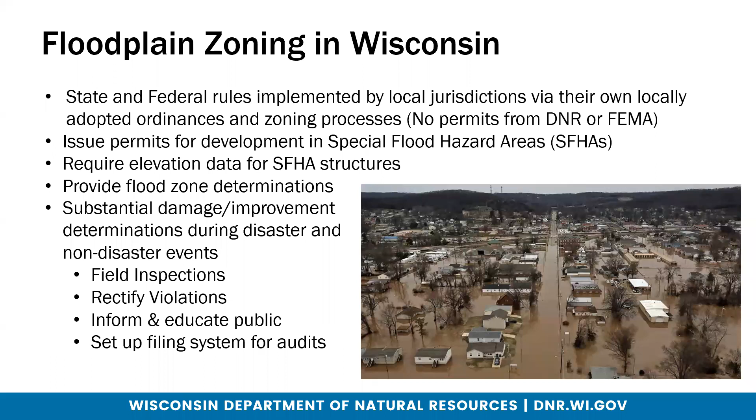And there's a lot of items that you have to do to enforce your floodplain management ordinance. You're doing field inspections, you're doing violations, you're trying to set up a filing system, substantial damage inspections. So there's a lot of stuff that it involves with the permit process.

So as we mentioned in the other sessions, all development in the floodplain requires a permit. So you want to look at your office: do you have a system set up that catches all development? It's tough. For instance, as counties, they may have some townships that have zoning authority. Some are unzoned, some are under county zoning. They may have their own zoning. You might have a city and village that has a building department and they issue the building permit, the UDC permit. They might not, and you subcontract that out.

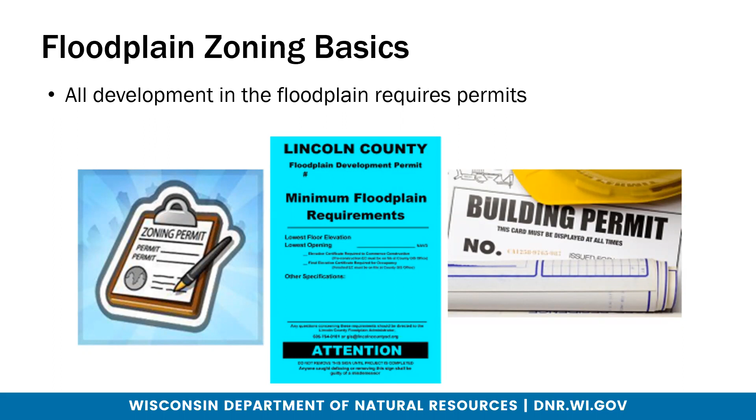How does that contract work? Does the UDC contract only cover new construction? Does it cover additions? How do you track that filling and grading job? That's the golf course changing the stream or adding a crossing for their golf carts. How are you getting that permit for filling and grading? So there's a lot of challenges out there to catch all development. So it's important that you look at your permit process and ask, do you have a process that catches all development for every different scenario? And that's a tough ask.

So when you do get that application in, you have to locate that property, and is it in the floodplain? As we talked about before, you might have this hatched area where my cursor is, and that's where the floodway is. Then you have that light blue area, and that's the flood fringe. And then that yellow area is the 500 year. And then we have those letters with the cross sections.

And what happens if you have an applicant that comes in and he has a pond back here on cross section DD, and he wants to build that house overlooking his pond? You have to have those discussions with them and see, is that area going to meet your ordinance? Is it going to have dry land access back there? Is he going to be able to put fill in the floodway without causing a rise? Those are some of the things that you're going to have to talk about and locate.

And remember, your jurisdiction is only in the mapped area. So if they're building outside of the mapped area, then you're not reviewing your floodplain ordinance. You might have to also review your zoning ordinance, your shoreline ordinance. So there's so many ordinances that you guys enforce, and you have to look at all of them on a case by case situation.

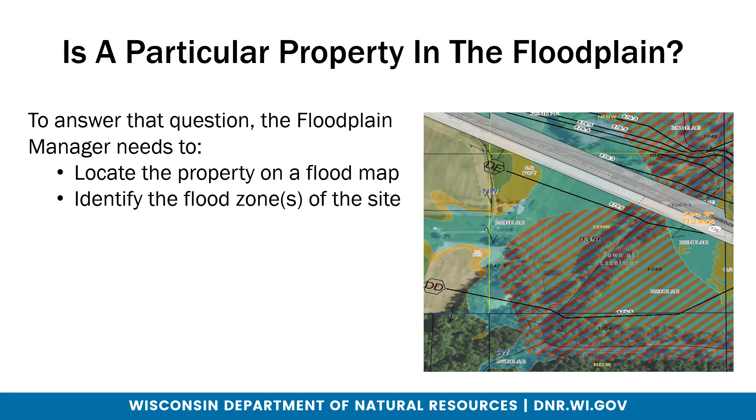So some of the things that you're looking at when a land use permit comes in: you have to make sure that they have the lot dimensions on there, that they have the base flood elevations in there, and you have to figure out what district they're in. Are they in the floodway district or in the flood fringe? Then you can apply those requirements. And if it's in the floodway, you'd have the H&H requirements. So these are just some of the examples of what you're going to need when that application comes in.

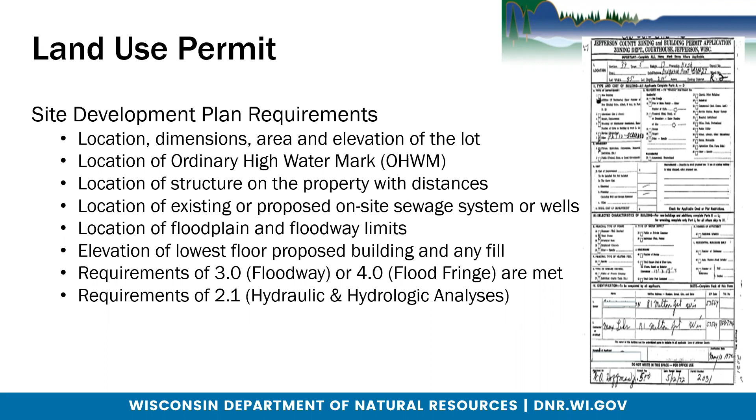The permit process. What kind of inter-office review process do you have? Do you have only one person that reviews floodplain? Do you have someone that reviews that person's work? If you remember only one thing today, I would ask that, if you don't do a checklist, you really consider doing a checklist in your office. When I worked for Sauk County, maybe 10 years we did not have a checklist, and the last 10 years we did have a checklist. And I can't believe the difference it made having a checklist.

When you guys are reviewing a permit application, you get interrupted all the time. You have phone calls coming in, you have the counter traffic, you have all these situations coming at you. And it's hard to remember where you left off on that application. And another thing I found out too, by having that checklist, you write notes. Like this checklist here as an example. I think if you were to create a checklist, I would add a huge comment section.

And that comment section can talk about all the things that were missing, the day you notified the applicant, how you notified them, because all of a sudden, if that permit's in your basket and you're out in the field, someone else can take a look at that application when that contractor calls or the owner calls and they say, what's holding up my permit application? And you don't have to be there because you might be out in the field, you might miss the phone call. It's just an efficient way to

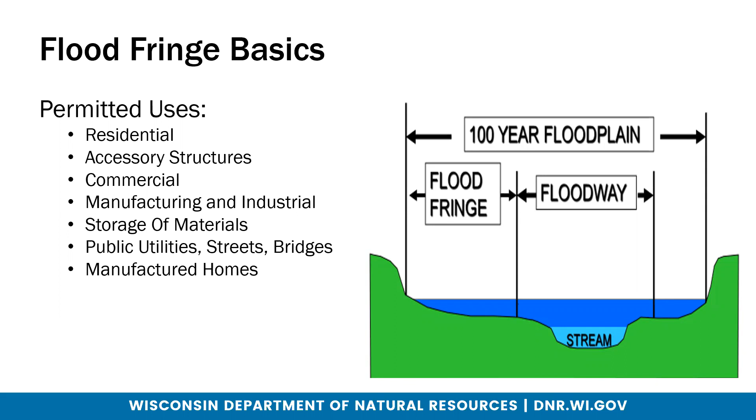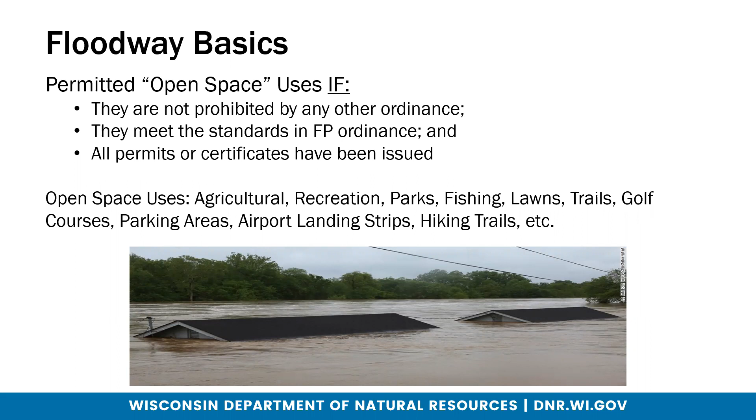And for floodway, it's mostly considered an open space use. You're prohibited from most other uses. If you think of it, it's where the water is moving, so there shouldn't be too many structures put in the floodway. It's important that all permits or certificates have been issued and that it meets your floodplain ordinance. Some of the open space uses, if you think of it, are parks, golf courses, stuff like that.

The floodway, this is a continuation. It should have low damage potential. It should not increase the flood elevations. For the most part, there should be no structures or fill obstructions. The only structure that really should be in the floodway, you'd think of something like a park shelter, with 4 posts and a roof, something that's not going to back up flow and won't be lived in. Those are about the only structures that should be put in the floodway, if you can think of an example. And some communities don't even allow that. So it's totally up to you on where you want to draw that line.

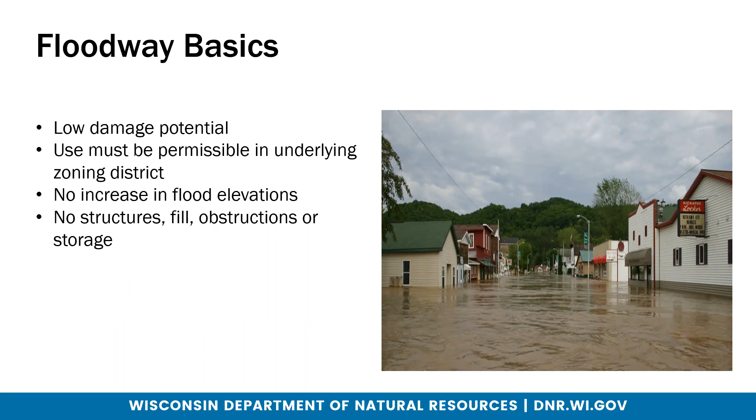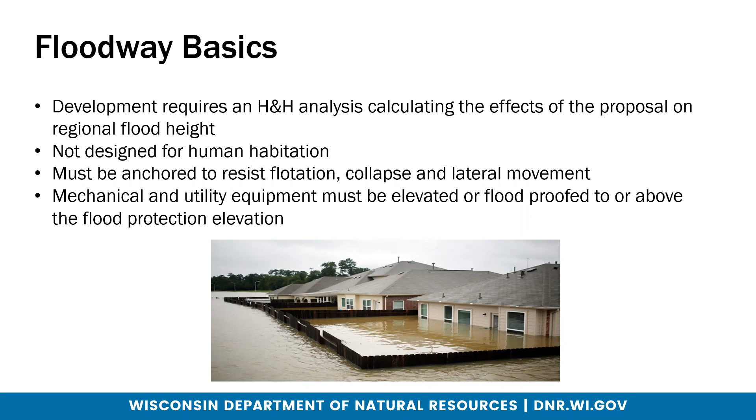Again, some of the floodway basics: if that permit application comes in, are you requiring an H&H? Are you making sure you're looking at a floor plan that doesn't have any human habitation? It should be anchored, and then the mechanical and utility equipment must be elevated to the flood protection elevation. That's a +2 when you see the flood protection elevation.

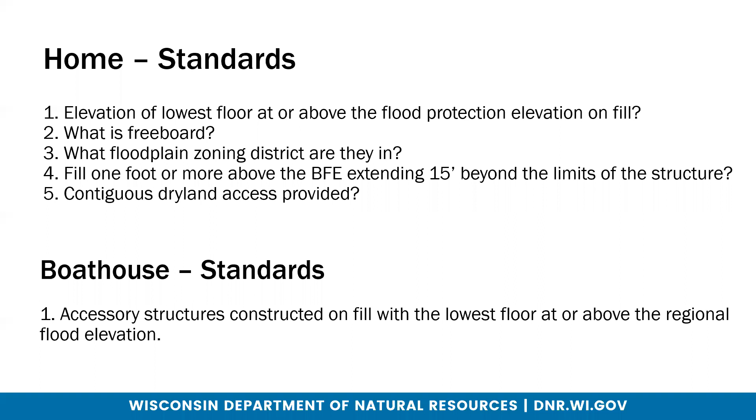So this is some of the things as that application comes in that we were just talking about. So let's say this addition was in the flood fringe. You have to have that fill 15 feet around the house. Right here, the 15 feet has to go around the house. The addition has to have that plus 2 feet of freeboard. What else are you looking at? So some of this is just showing a picture of what's in your flood fringe, as it's listed out and how it works. So in the flood fringe, you can build, but you have to have the plus 2, and then you have to have that full 15 feet of fill around the house, a foot high. And this is just showing an example of a picture of what your ordinance says.

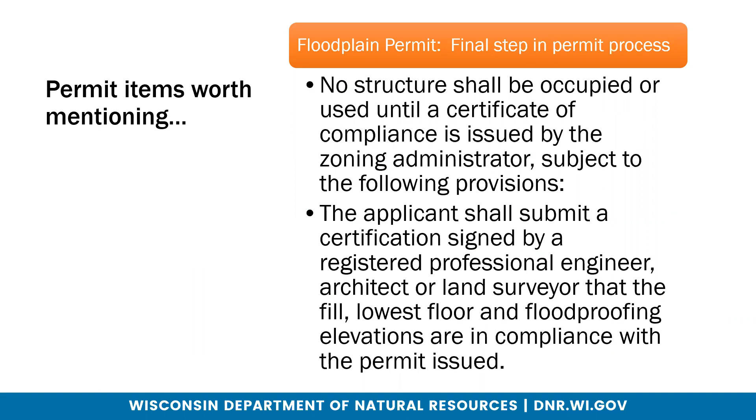And again, this is talking about having that as-built survey at the end. This is something that's in your ordinance that many communities forget to do, is having that as-built done. So it's important that when you have that conversation up front, they're aware of that requirement.

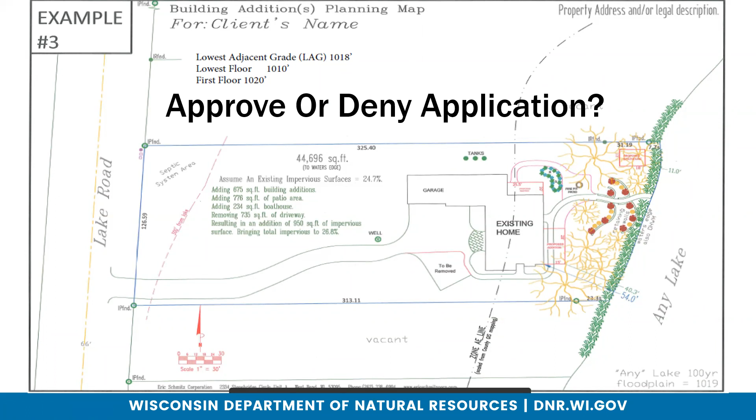One thing I wanted to point out too: a lot of people talk about first floor, but there's really nothing in your ordinance that talks about first floor. Everything in your ordinance is lowest floor. What people talk about with first floor is flood insurance. Flood insurance requirements look at first floor, but for floodplain management, you look at lowest floor.

FEMA is in the process of having a new elevation certificate. It's not out yet, but you'll see this come into your office, and it can be used as your as-built. Most communities do not have this in their ordinance, that an elevation certificate is required, except for CRS communities. CRS communities require an elevation certificate, but the rest of you, for the most part, don't have it in your ordinance that one is required. They can be used for that as-built survey.

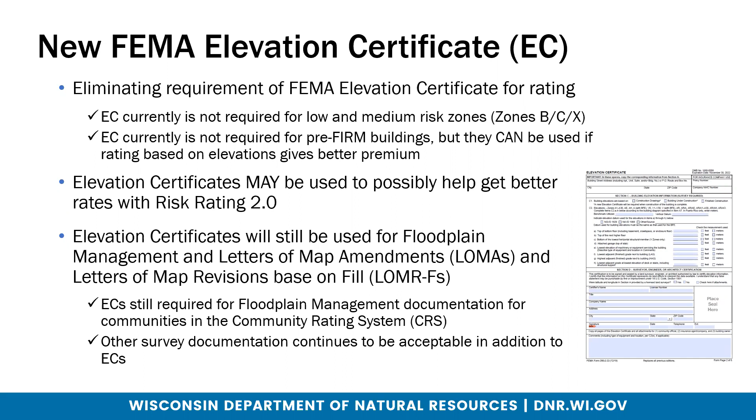Another thing to consider: if you're doing a stream bank or stream work project and issuing that floodplain filling and grading development permit, has the applicant gone through the Army Corps, U.S. Fish and Wildlife? Are there any federal, state, or DNR permits required? Do you want those permit applications from these other agencies ahead of time, to make sure the project's going to be approved before you issue it? So have that construction meeting ahead of time and get all that up front.

This is just talking about how pre-application conferences are so important, to have those meetings ahead of time, get everything up front, show them the checklist, everything that's going to be required, so there are no surprises during the process.

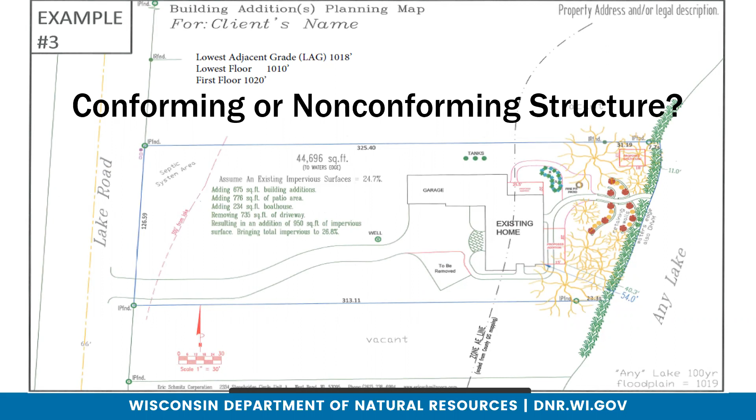And we already went through this slide, you guys did a great job - you realize that the structure is non-conforming. So we'll go through an example. Since the structure is non-conforming, we'll go through what you would have to do to be able to issue those permits for that addition. So you'd follow the 50% rule.

You need the cost of the improvement divided by the equalized assessed value, which equals the percent of improvement of the cost. If it's 50% or more, it's considered substantial improvement. And if it's substantial improvement, that means it's considered new construction, and you basically treat it like it was a vacant lot.

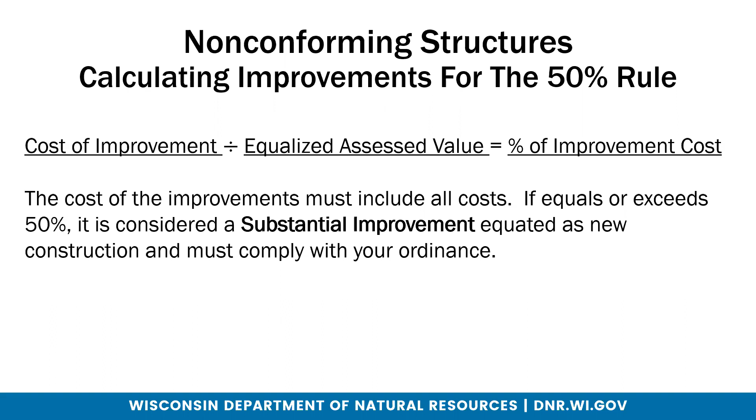What you do is find the assessed value in the tax records, go to the treasurer's office, and use the improved value - the assessed improved value. You don't take the total value of the property, just the assessed value of that structure. If they have several different structures on the property, you just use the one they're improving on. To get the equalized assessed value, you have to use a ratio to make sure it's fair for everyone, because each township has a different ratio. So you divide that ratio against the assessed value, and that gives you the equalized assessed value, which is what you use for the value of the structure.

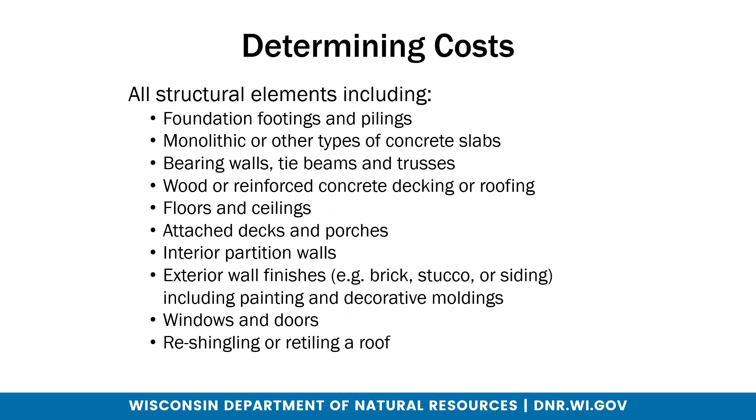So like the permit fees, the plans to draw it up, those are not included in the costs. Demolition costs associated with the cleanup and debris removal are not included. The structure fill to bring that fill in before they build is not included. Any plug-in appliances are not included, and any detached structures are not included. And your driveway, fences, swimming pool, stuff like that's not included. So we have examples attached that will show an itemized list of what you want to include for those costs.

All right, well, we're going to go ahead and launch a little poll here. Pull this up. All right, so this question asks for you to complete the statement to make it true. This is a multiple choice. So building in compliance with the floodplain ordinance is required for new and substantially improved structures, reduces but does not completely eliminate flood risk, eliminates the need for flood insurance, or removes the structure from the mapped floodplain. And I'll give you a hint, there's actually two correct answers here. So we'll give you a few moments to go ahead and complete that poll.

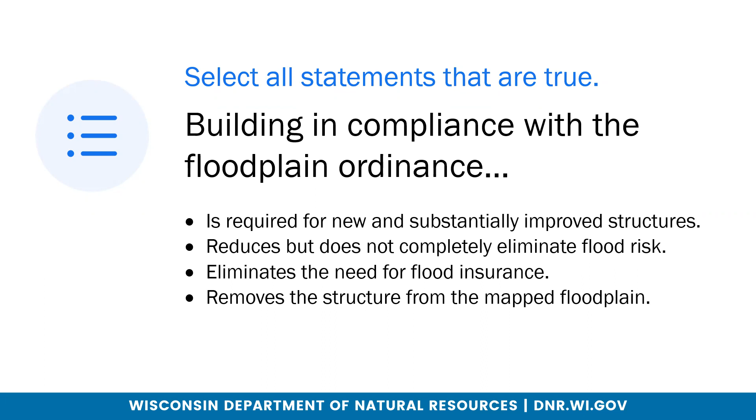And so what happens is after someone builds, you get a call from their bank saying, well, now you're going to have to pay flood insurance. And what do you mean I have to pay flood insurance? I'm 2 feet above the floodplain, but they're still in the mapped area. And so the structure is not removed from the floodplain, even though they're +2. And so this is a very confusing situation that happens out there. And so a lot of communities aren't aware of this, but you actually have removal standards, a rezoning process in the beginning of your ordinance. And I'll go through that here.

So sub A that's highlighted there, this is your rezoning process. So if you look at this really closely, your rezoning process and how to build in the flood fringe are a little different. The +2 feet is the same, but that +2 feet of fill has to go to land all the way outside the mapped floodplain. So you can't create an island, you have to create a peninsula. And you see there's no dry land access requirement here. There's no dry land access waiver requirement. Whereas in your flood fringe section on how to build in the flood fringe, it's a little different than how to remove yourself out. So not everybody's going to be able to remove themselves from the floodplain.

And so it's very important that when you have those pre-construction meetings, you ask them, what is the goal? Are you trying to just build in the floodplain, or do you want to remove yourself from the floodplain? And so it's important that you ask those questions up front so they know. And I just wanted to point out sub C here. So 5 sub C, that is the LOMA bill that we talked about last time, that Act 242.

And that's just saying if you have a LOMA, they are automatically removed from the floodplain, so they don't have to go through the rezone process. And that was Act 242. So I just wanted to bring your attention to that. That's how it's written in the model.

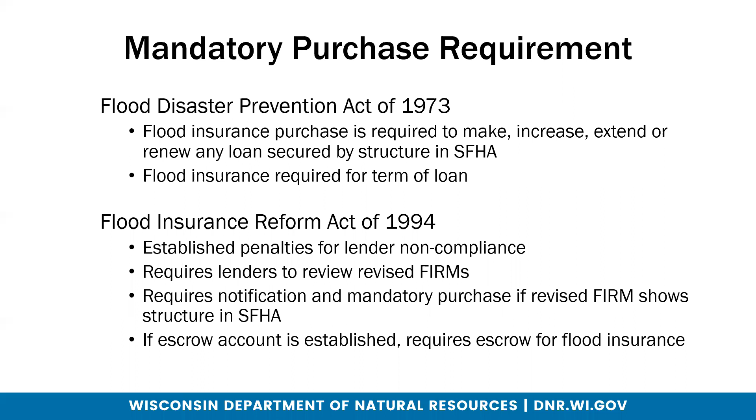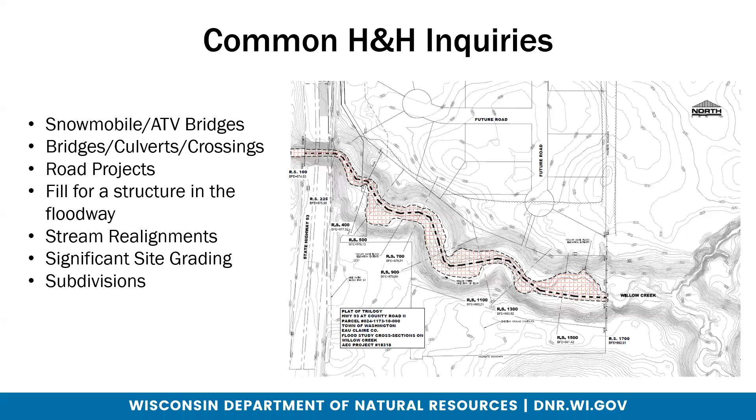Some of the common reasons why you're going to require an H&H are snowmobile bridges, road crossings, culverts, road projects, stream realignments, and site gradings. What is an H&H? It's the hydraulic analysis, using a modeling system called HEC-RAS. It delineates where the water is moving versus where the water is standing, and that's how you come up with the floodway and flood fringe. It also gives you the regional flood elevation.

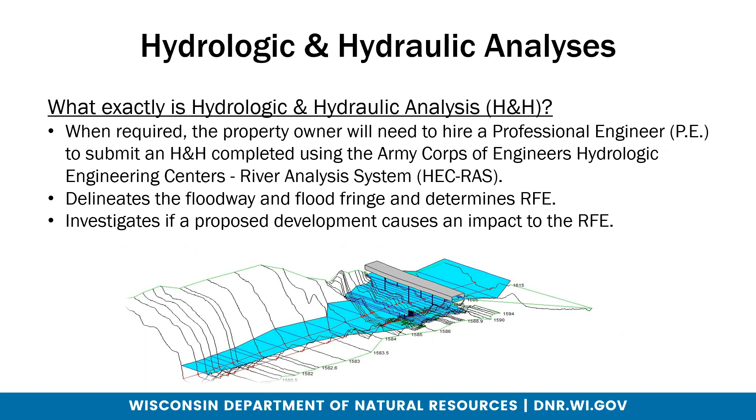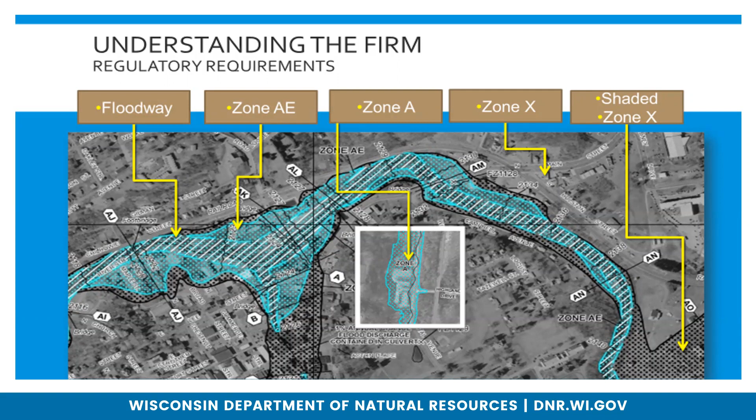As we talked about in webinar 1, the hatched areas are where the floodway is. If you're in the floodway or you don't know where the floodway is, you're going to have to do that H&H to determine where that district is. If you're in the flood fringe where the water's standing, you won't have to do an H&H, though there are a few exceptions. Let's say you have a zone A stream flowing into a zone AE, then you might have to do an H&H. But for the most part, in a flood fringe, you do not have to do an H&H.

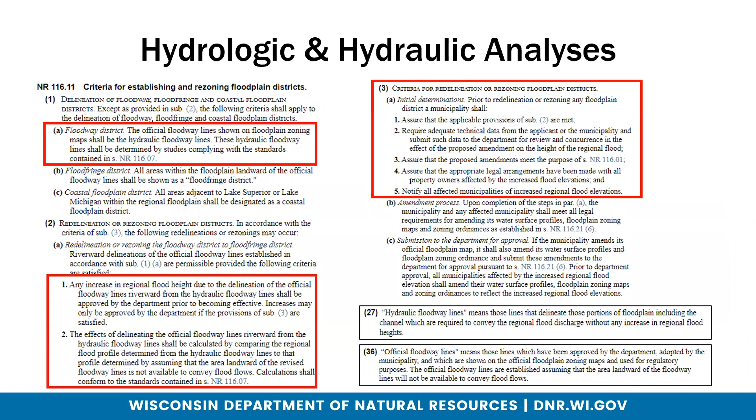Work with your water management engineer, and you guys have been doing a great job since these webinars. Our water management engineers said they're getting more phone calls from you, so that is awesome. We're here as a resource. H&H is a really confusing topic, and you don't have the modeling background or access to these models. So don't just tell an applicant, yep, you have to do an H&H. Reach out to your water management engineer and find out if one is required, because they're not always required. Sometimes if we have detailed plans, we can look at the model, make that decision, and help you with that process. And we get questions all the time: how much do they cost?

I've seen them cost $3,000 and I've seen them cost $30,000. So it's important that you tell applicants to get more than one bid, get 2 or 3 bids, and use consultant firms, engineering firms that are used to doing this process, and ask them for some references. And by doing that, they'll hopefully get a cheaper cost. And it just depends on the project and what's going on and how much they cost.

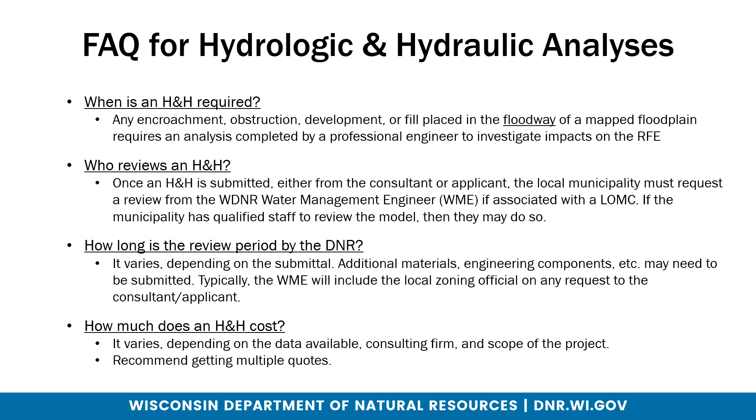One thing I wanted to let you guys know is that FEMA, when you get a LOMA, and we'll go through what a LOMA is in just a sec, but letters of map change used to be sent by paper copies to you guys. And FEMA is no longer submitting paper copies of letters of map change. So it'd be important that you guys sign up for this subscription here to get notified if you have a LOMA in your community of what's going on.

Like a LOMR, you'll still be aware of that situation, but for a LOMA, they are no longer submitting that. So if you want to receive copies of letters of map change, make sure that you sign up for the subscription. We just wanted to touch on letters of map change. So letter of map amendment is an example here. It's not the only example, but if a person thinks that they have been mapped in the floodplain by mistake, they can ask for a letter of map amendment. And that's what a LOMA is.

So a LOMA changes the map by letter. It's not going to put a little tiny circle on the map. You're not going to get a new map. It's just changing the map by a letter. And it's used for land that is naturally higher than the floodplain elevation. So you can't use fill to use a LOMA.

So it's just for natural ground. As these maps become more accurate over time, they're going to get more detailed. If you have a contour system in your community that has only a 10-foot contour system, those floodplain maps are not going to be as accurate as a 1-foot or 2-foot contour system. So as we get better data out there, the maps are going to get more accurate.

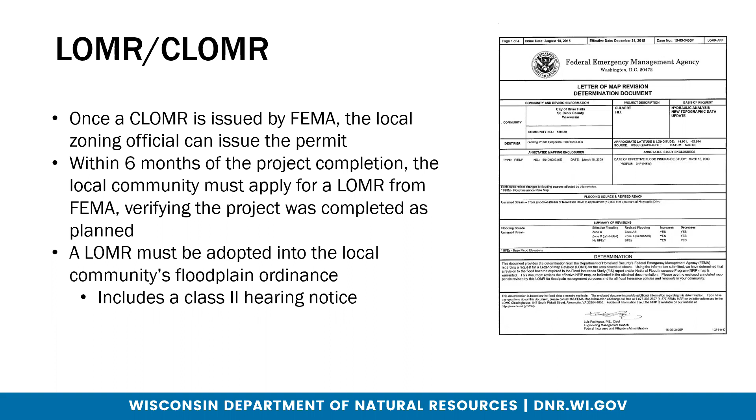And it's important to remember that just because someone's remapped and might not have to pay flood insurance anymore doesn't mean that they're going to be automatically safe from flooding. As I think we talked about in webinar 1, depending on what state you're in, FEMA issues 25 to I think 48% of their claims outside the mapped floodplain. So it's important that the owner realizes that flooding does happen outside the 100-year floodplain.

LOMR-Fs, we're going to touch on a little bit. A LOMR-F is when you add fill to the flood fringe. So if you're adding fill to the floodway, that needs a LOMR application, and an application to the flood fringe is a LOMR-F. And a lot of times an applicant will give you the wrong form.

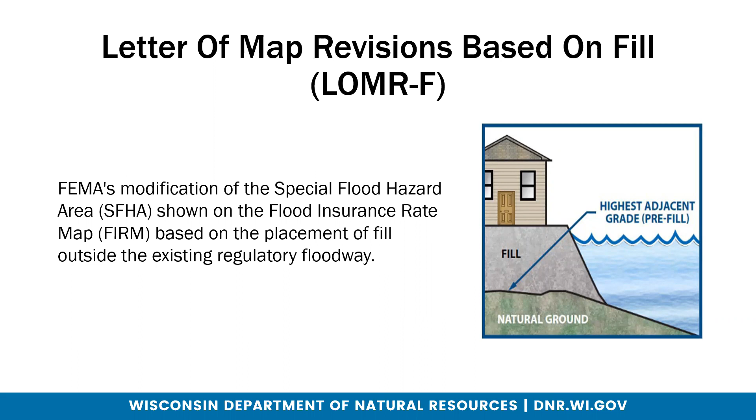So there's something called a community acknowledgement form, and a lot of times they'll give you the wrong one. So if you remember anything else today besides having a checklist, establish a checklist, do not sign these community acknowledgement forms until you work with your local water management engineer, because these are confusing. We'll check to make sure they actually submitted the right community acknowledgement form to you.

FEMA has what they call an MT-1 application and MT-2 application. So we'll double check to make sure that they applied for the right one, and that they're meeting the removal standards from your floodplain, and then we'll just go through that process. So just don't sign those, because when you sign those, you're taking on the liability, and it says that this property is reasonably safe from flooding. So you just want to know what you're signing, so we'll help you through that process.

Why does FEMA have these community acknowledgement forms? They just want to make sure that they're following your ordinances, that they took out the right permits before they applied, and that it does meet your ordinance. You don't get too many of these, but if you do get one, just remember, don't sign it until you work with us, and we'll walk you through that process.

So I think I went through a lot of information fast. You guys did really good on answering the questions, and we can go through some of the questions I haven't answered yet. Thanks, Brian. I've been tracking the questions, and there's a lot of good ones in there. So I think I'll start with some of the more recent questions that you just handled, and then we'll work our way back towards a couple that have even been answered in the chat.